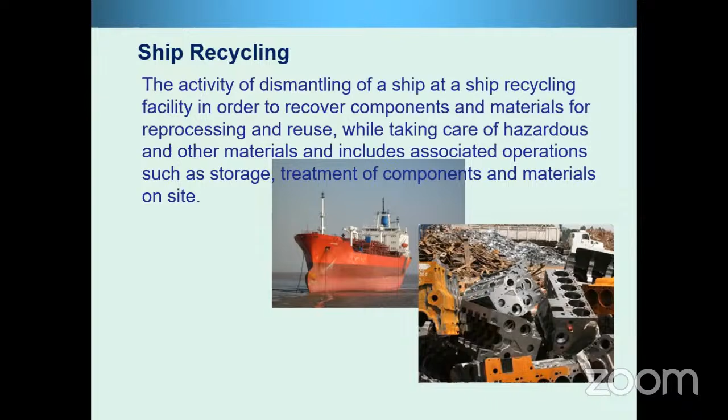So for those who are not familiar with the ship recycling work environment, I am adding some photographs to get some idea. So you can see here, this is a beaching layout, as it is generally called. The ship is brought to shore. You can see on the left side. On the right side, you can see one ship which is partly cut, and the people are engaged in reducing the ship one by one. So here the process has started from the fore, and the ship will be brought to the shore as soon as each section is cut. After that, the ship is pulled ahead, and again the next section is cut, and the process continues till the end of the ship is addressed for recycling.

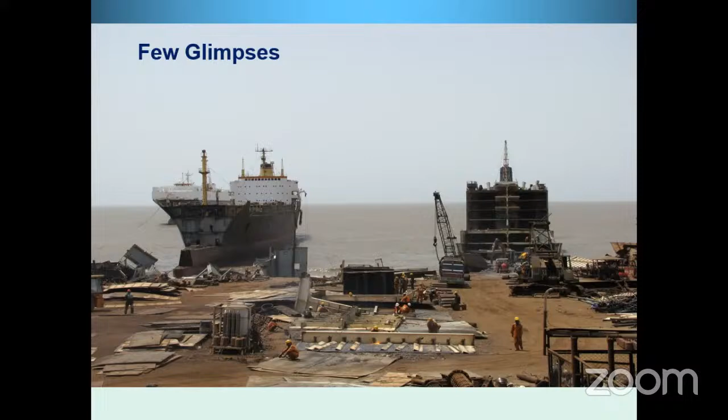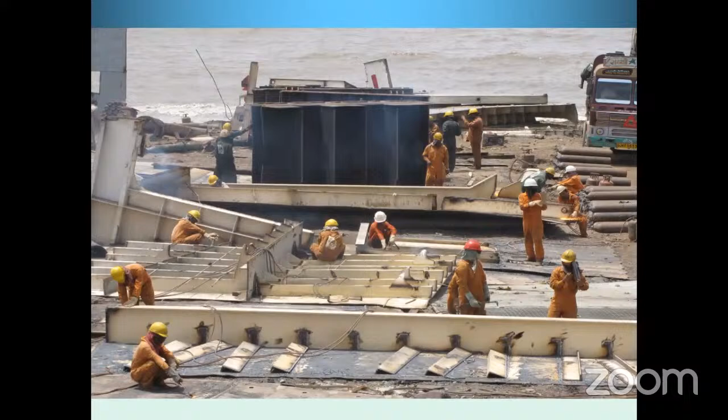Once brought on shore, these parts are generally cleaned, washed, and then further broken into pieces, and these pieces are then given to the interested parties. We will see about that later. So this is another picture. These are old pictures actually. The environment has improved a lot. The practices have changed. Stop me if there is any clarification required in these pictures.

Now we can see here the parts are segregated in a storage place. So likewise, all the parts will be stored in a storage area. And from here, they will be sold to the recyclers or maybe scrap parties or whichever buyer is interested.

So the ship is now broken into pieces, and this is the final outcome, what we can see here. So this is being used for other industries as a raw material. So in brief, I think the activity of ship recycling is clear, the definition of ship recycling.

Then what is the importance of ship recycling? So it is providing direct and indirect employment generation opportunities to a lot of workmen or workforce. And here the specialty is that many unskilled people get the employment opportunity. Unlike where you need very highly qualified, educated staff, here the requirements are not that; only the people who undergo basic training. And after that, with on-job training, they get experienced, and these people get a livelihood, and they can have employment in some direct or indirect form.

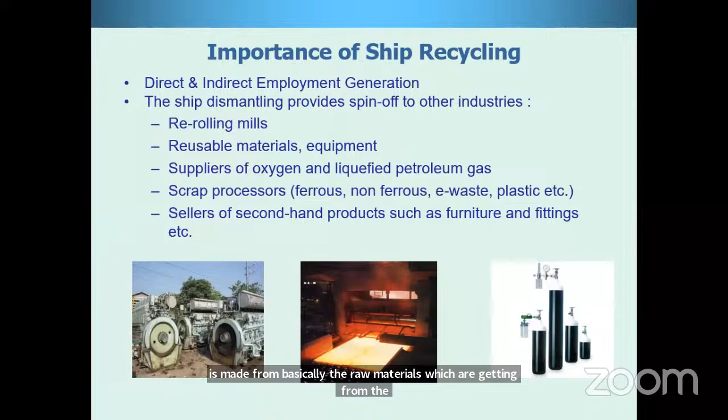Shall I move ahead? Sir, you can move on. Sir. Okay.

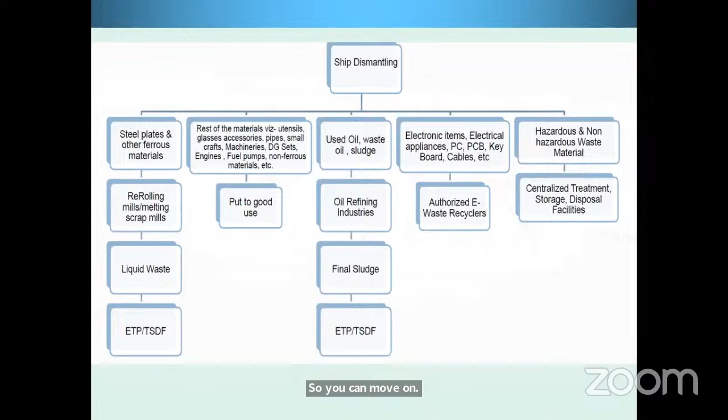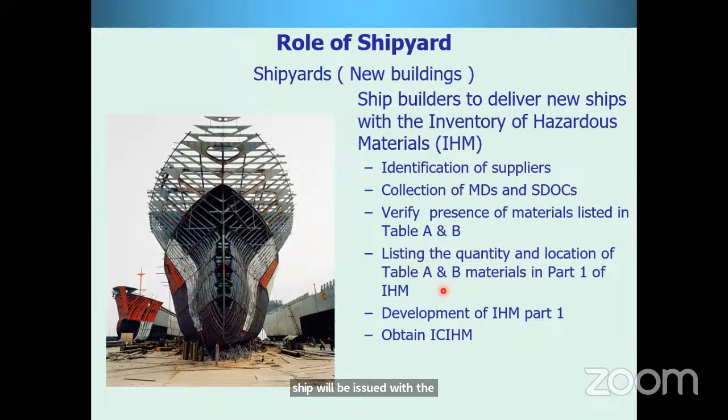Yes. So how to prepare this Part 1 IHM? We'll just briefly see this process. Since it is the responsibility of the shipbuilder to develop a Part 1 IHM, and the shipbuilder is involved with a lot of suppliers and OEMs, it is very difficult for a shipbuilder to investigate the presence of hazardous materials on their own. If they have to do this, they have to do random sampling of every supply, give it to a laboratory and then analyze. So it becomes a costly as well as a time-consuming exercise.

So the convention has set some framework, and the convention has given basically two forms. In short, they are called MD, for material declaration, and the other one is called SDoC, which is nothing but a supplier's declaration of conformity. So by providing these two forms, as the figure shows here down below, the shipyard will request its primary or tier 1 supplier to give information on the material declaration and SDoC.

If the primary supplier is getting sub-supplies from its vendors or secondary suppliers, he in turn will ask the same information from his suppliers. This chain will follow through, and from the bottom of the chain, the tier 1 supplier will get all the information about the material declarations and SDoC. Then the primary supplier is supposed to give this information to the shipbuilder.

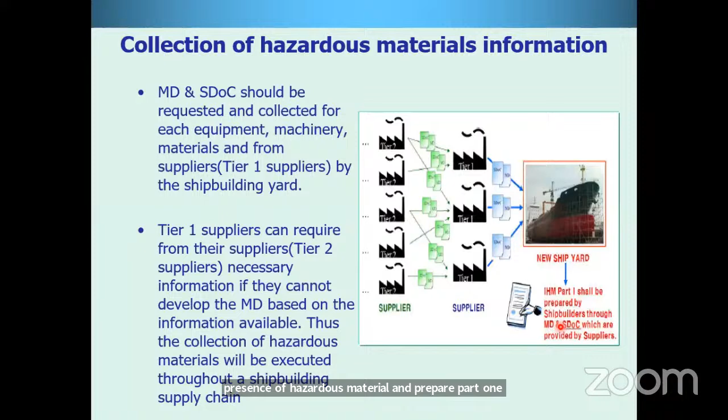So what do these forms mean? This is a brief explanation of the form. MD means material declaration form. It gives information on what the product contains.

So in general, one minute, this is not stopping. Okay.

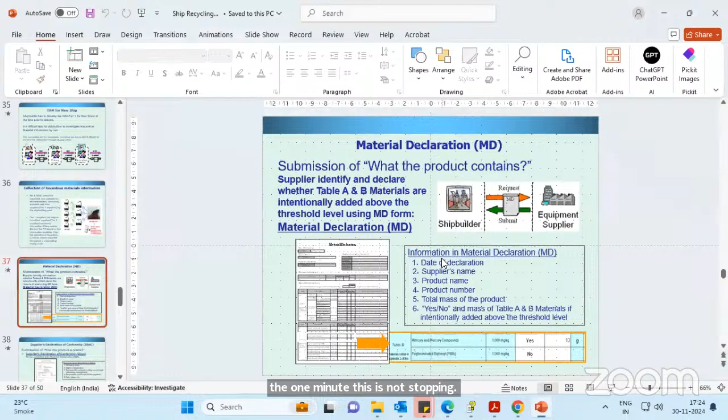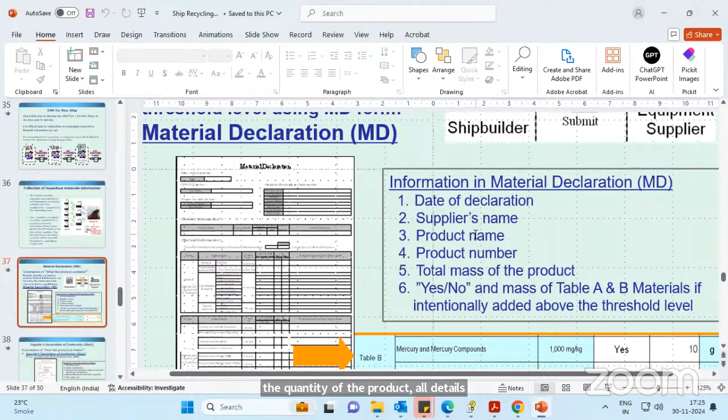So in this form, generally the supplier details are present. The product name, product number, the type of product, the quantity of the product, all details are identified in the form. Followed by that, there is a verification for Table A and B materials. So here is something like this, Table A and Table B material. So in Table A material,

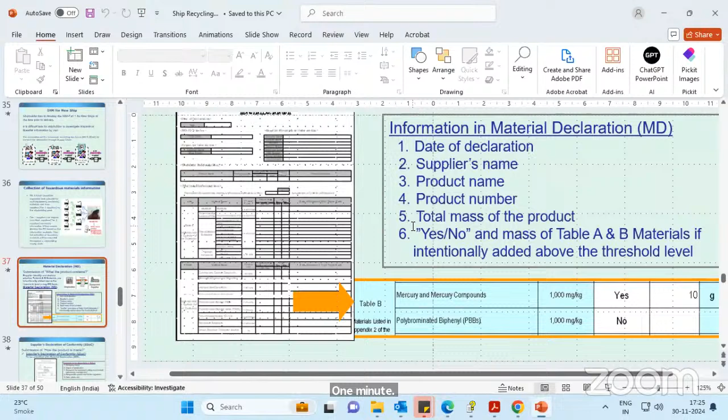If the product contains any hazardous material, there is a questionnaire in the form. If the hazardous material is present, here is one example down below, you can see here, Table B, mercury and mercury compounds. If the material exceeds the threshold value, the response is given yes. And if yes, what quantity of the hazardous material is present, and in which item and which location that hazardous material is present. So detailed information is available in the material declaration form.

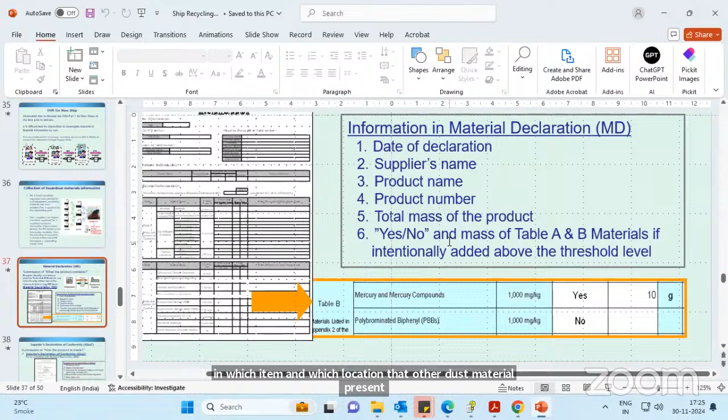So this detailed information is further authenticated by the supplier's declaration. By signing this supplier's declaration form, the supplier is legally bound to accept that whatever declaration he has made is true and correct. So normally the MD form and SDoC form are interlinked with a unique SDoC number.

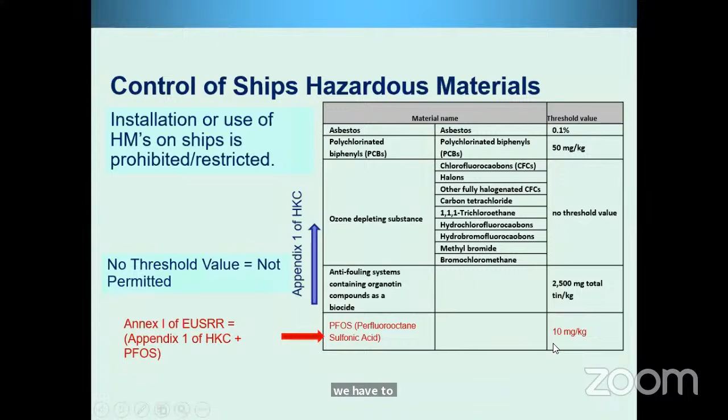So as I was referring to Table A and Table B materials, these are basically the Table A materials. These materials are prohibited for use if they are present above the threshold values mentioned in the third column. Okay, and if the compliance is for the EU Ship Recycling Regulation, we have to take care of PFOS as well. So these are Table A materials, these are prohibited.

And on the right side, if you see now, these are Table B materials. The use of these materials is restricted. It means that these materials can be used. However, if they are crossing the respective threshold values, they are supposed to be listed in Part 1 of IHM. And vice versa, if they are below these threshold values, then they can be used, and they need not be listed in Part 1 of IHM. I hope this is clear to the participants.

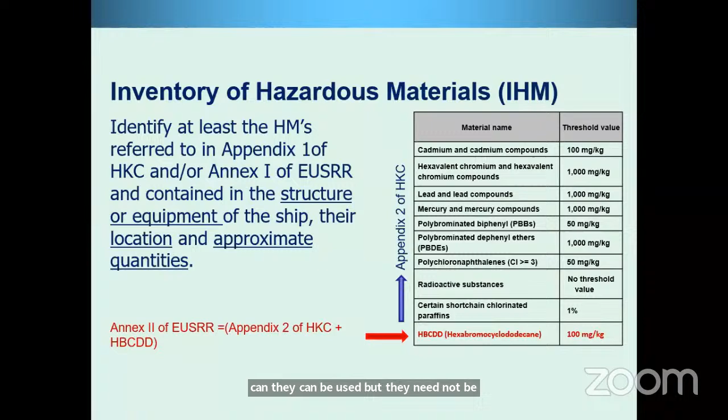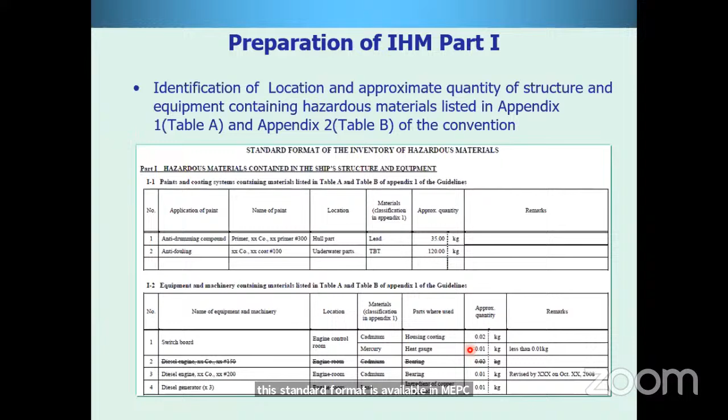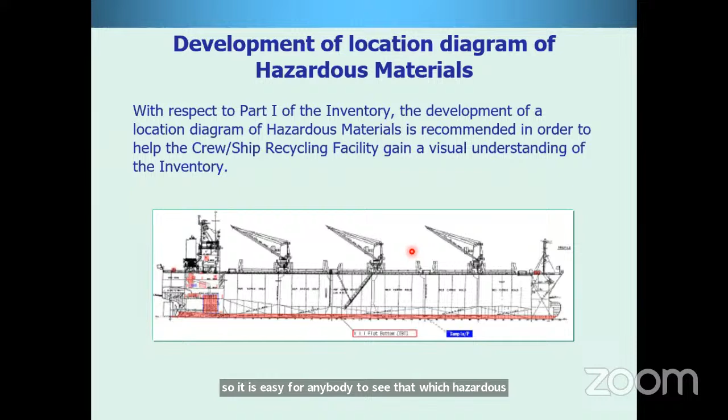And after getting the correct information, shipbuilder is responsible for collecting all MD and SDOC together. Then complete part 1 of IHM and offer the vessel for initial survey to the flag or RO. Then get part 1 approved, followed by issuance of ICIHM or statement of compliance, and hand over this part 1 IHM and certificate to the prospective ship owner for further maintenance and update.

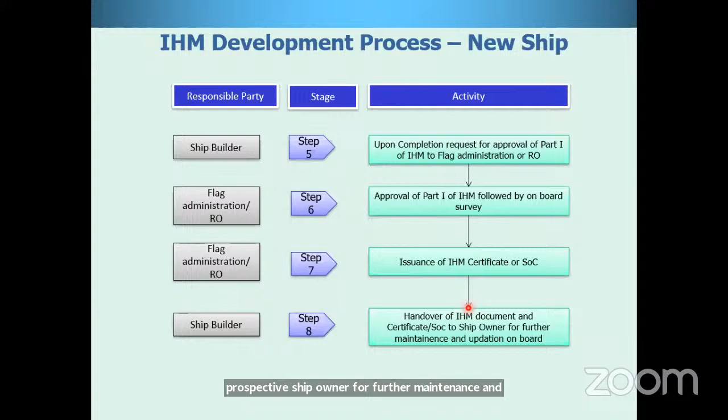So this is something important for shipyard. What is the role of shipyard? So in a new build ship, shipyard has to go for making a policy on item procurement. Shipyard has to identify a person who is responsible for requesting MD and SDOC, getting its verification and development of part 1 IHM. Then shipyard also, in its policy, has to ensure that there is awareness amongst the people on the use of prohibited and restricted material. And where in suspicion, shipyard should have random sampling checks using accredited laboratories.

So shipyard should implement a procurement policy and get it integrated with its quality management system, so that there is accountability and record keeping is maintained within the organization. Then shipyard is also supposed to map the accuracy of the location, quantity, and the correct description of the items listed in part 1 of IHM, and have a procedure for proper handover to the ship owner or the company for future update and maintenance. So as a shipyard, this is an important thing. And in fact, as IRS, we have written to several shipyards for implementing these policies and integrating them with their QMS.